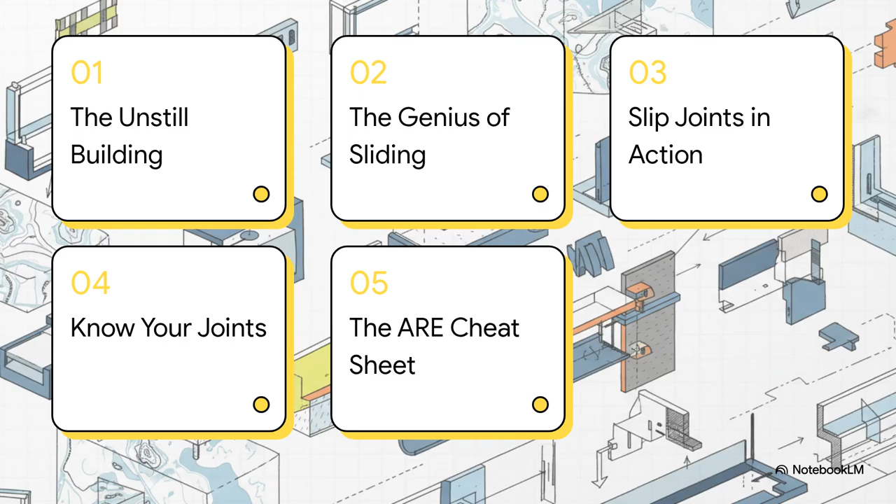So here's our game plan. First, we're going to dig into why buildings are, believe it or not, constantly moving. Then, we'll get into the brilliant solution, the slip joint. After that, we'll break down the exact details you're going to see on exam day, clear up some major confusion between different joints, and then I'll give you the ultimate cheat sheet to lock it all in. Sound good? Let's go. All right, let's kick things off with section 1, the unstill building.

See, before we can really appreciate the solution, we have to understand the problem. And the big secret, the one that causes so many headaches, is that buildings are never, ever standing still. So that begs the question, why do buildings move? I mean, it kind of goes against everything we think about architecture, doesn't it? We build these massive, solid structures that are supposed to be permanent. But the truth is, a building is way more like a living thing. It's constantly shifting and adjusting to everything happening around it.

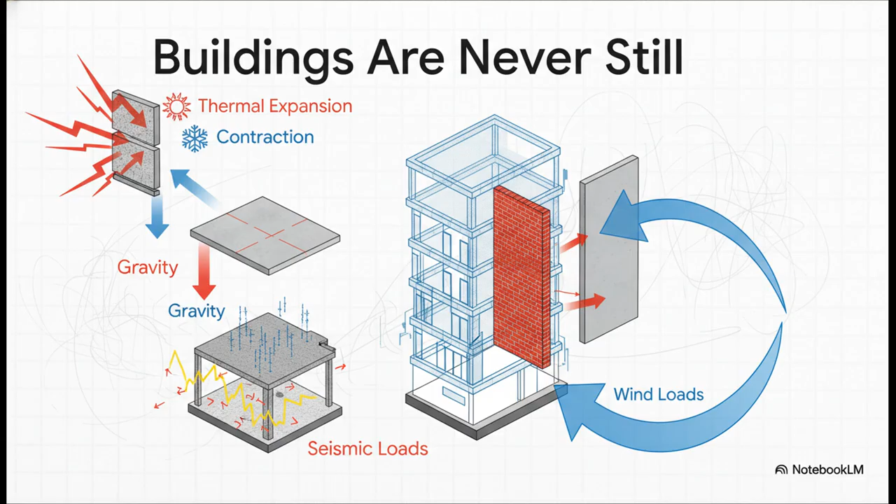I mean, just look at all the forces at play here. You've got the sun beating down, causing materials to literally swell up, and then the cold comes and shrinks them back down. You've got plain old gravity, causing that heavy concrete slab to sag just a little bit over time. That's deflection. And to make it even trickier, different materials move at totally different rates. Oh, and then you throw in wind and earthquakes, and you've basically got a constant battle going on inside the building itself.

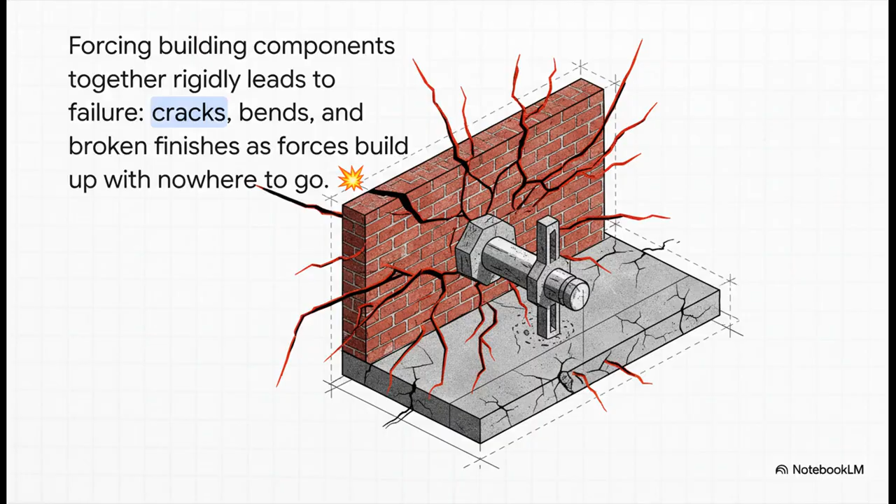So, what happens if we just ignore all this movement? What if we just bolt everything together nice and tight? Well, you get absolute chaos. Those forces have to go somewhere, and they'll escape by creating these awful cracks in your drywall, buckling a perfectly good brick facade, or shattering expensive finishes. This right here is a classic ARE trap. They'll show you a failure like this and ask you to figure out why it happened, and the answer is almost always restricted movement. And that brings us perfectly to our next section, the genius of sliding.

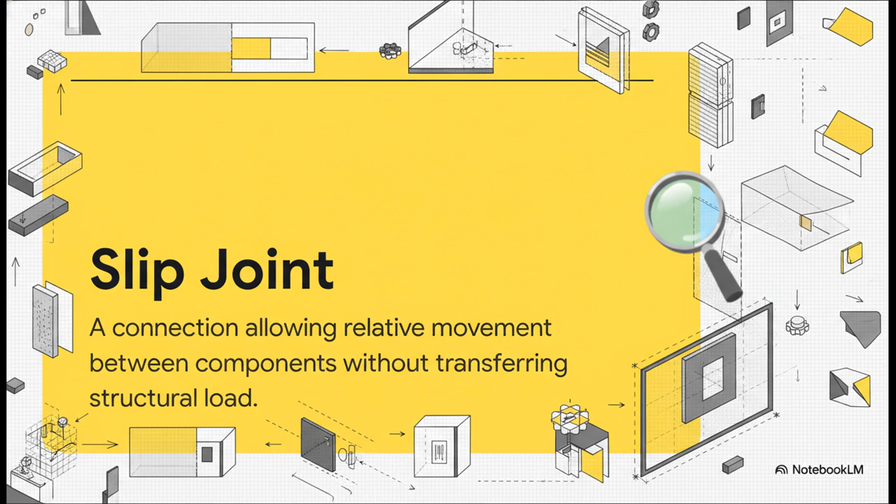What if instead of trying to fight this impossible battle against physics, we could just outsmart it? What if we designed a connection that just lets things move? And that, my friends, brings us to the hero of our story, the slip joint. Now, the official definition is beautifully simple. A slip joint does two things, and only two things. One, it allows two parts of a building to move past each other. And two, it does this without transferring any structural load between them. That's it. That's the whole magic trick.

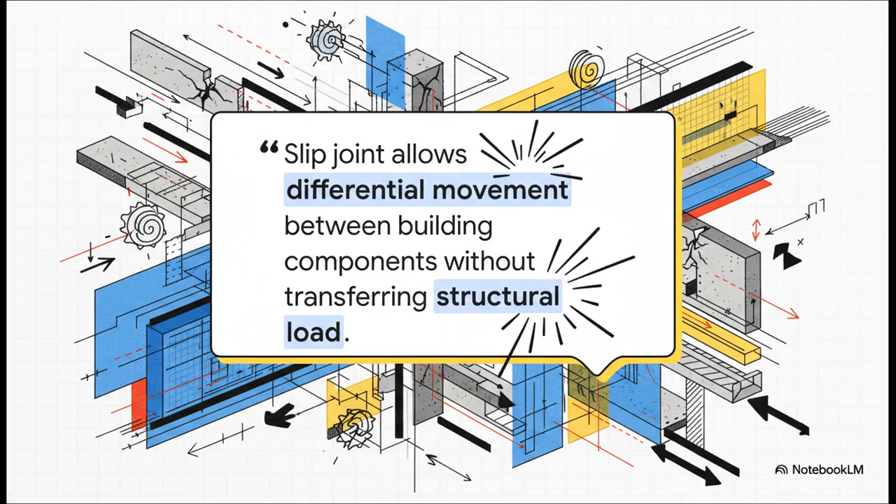Listen, if you memorize one single sentence for your exam, please make it this one. This is the logic that will unlock any question they throw at you about slip joints. It allows differential movement, and it prevents load transfer. Seriously, burn this into your brain. Okay, let's break that down even simpler into what I call the slip joint mantra. Think of this as your quick 3-point checklist for the exam. Does the detail let things move? Check. Does it stop a structural load from going where it shouldn't? Check. Is it dealing with two different things moving in two different ways? Check. If you can answer yes to all three, you are looking at a slip joint.

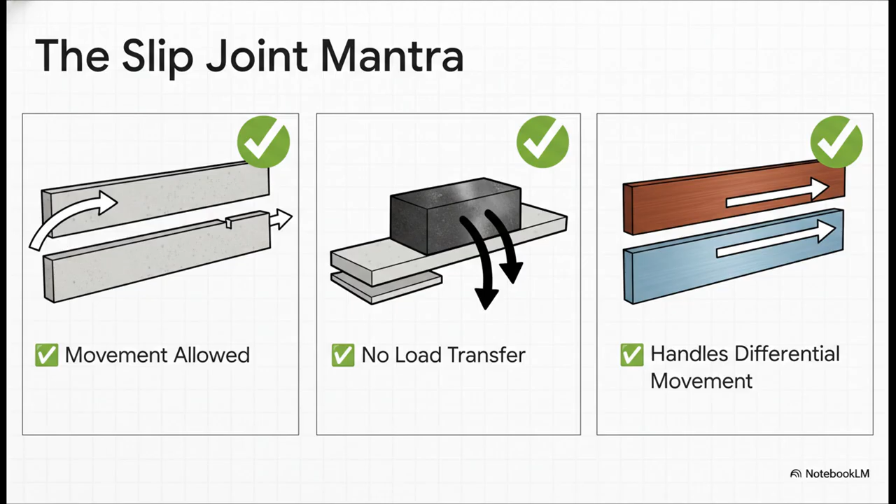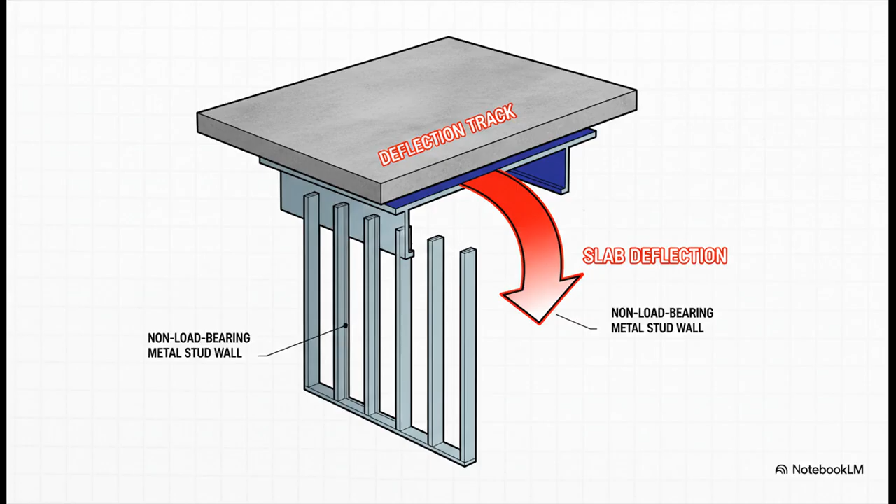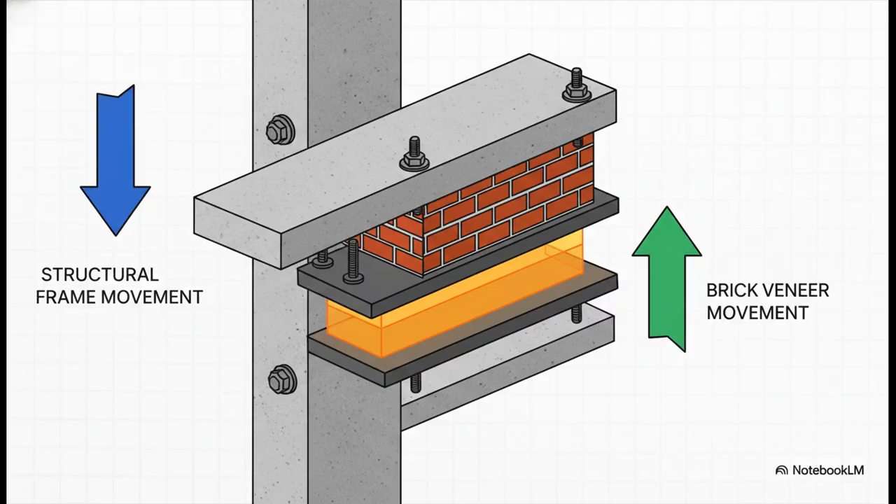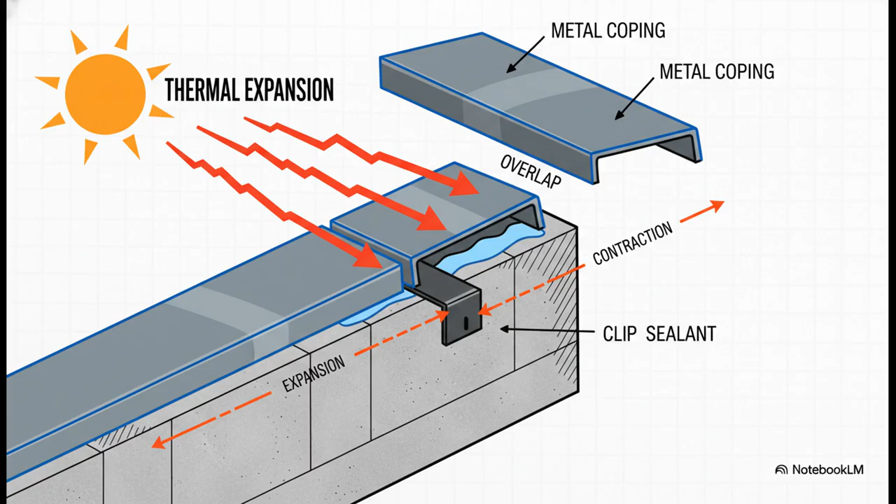And finally, picture a long, dark metal coping on a parapet wall, just baking in the summer sun. That metal wants to get longer, a lot longer. If we tried to make it out of one continuous piece, it would just warp and buckle into a total mess. So instead, we detail it with these simple overlapping slip joints. One piece can slide nice and smoothly over the next as it expands and contracts, all while keeping the rain out. It's such an elegant solution for thermal movement.

Okay, this next part is huge because it's a major point of confusion and a classic exam trap. You have got to know that not all joints are created equal. So let's get this straight right now so you don't lose any easy points on this. All right, focus in on this chart for a second because this is where people really get mixed up.

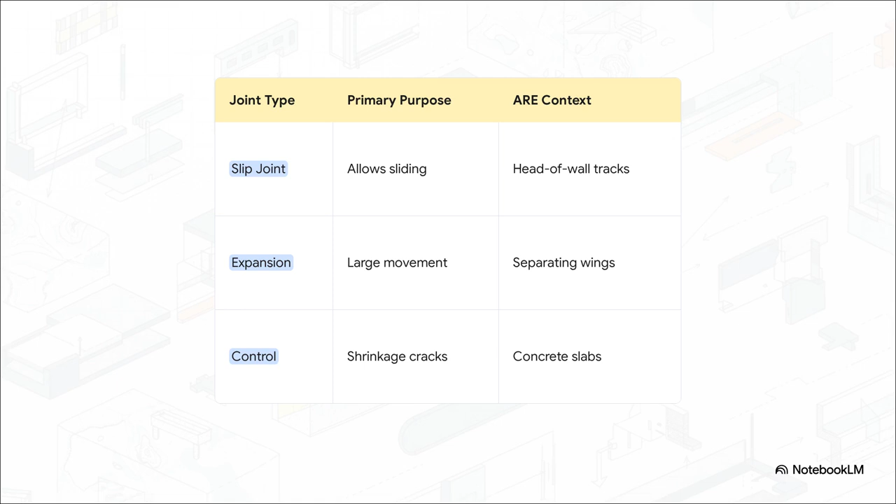A slip joint, like we've been talking about, is for small-scale sliding between two different parts. Now, an expansion joint is for massive movement. We're talking a complete separation between huge parts of a building, like two different wings. And a control joint is something else entirely. It's basically a planned weak line to tell a single material, like a concrete slab, exactly where you want it to crack as it cures. So think about scale: sliding components, separating buildings, or controlling cracks.

And just to show you how this all connects, because for PPD and PDD you have to think about the whole system, that little slip joint has other jobs too. It needs to have a flexible membrane across it to keep the air barrier continuous for energy efficiency. And what if that's a fire-rated wall? Well, the joint itself needs to be stuffed with a special fire-rated system that can still move while stopping a fire from getting through. It's never just one thing in architecture, is it?

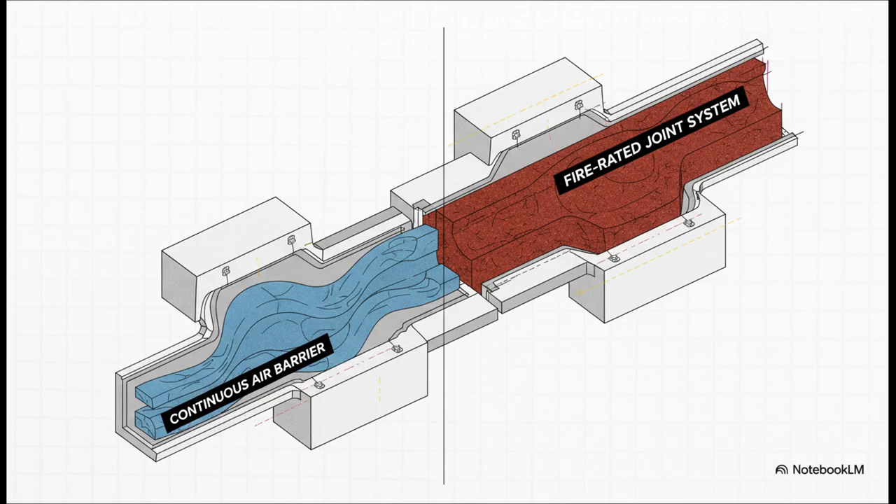Whew, we have covered a ton of ground. So now, for our final section, I have boiled everything we just talked about down to the one single slide you need to screenshot, memorize, and look at right before you walk into that testing center. Here it is. The purpose: allow movement, prevent load transfer. The key locations: tops of partitions, shelf angles, coping.

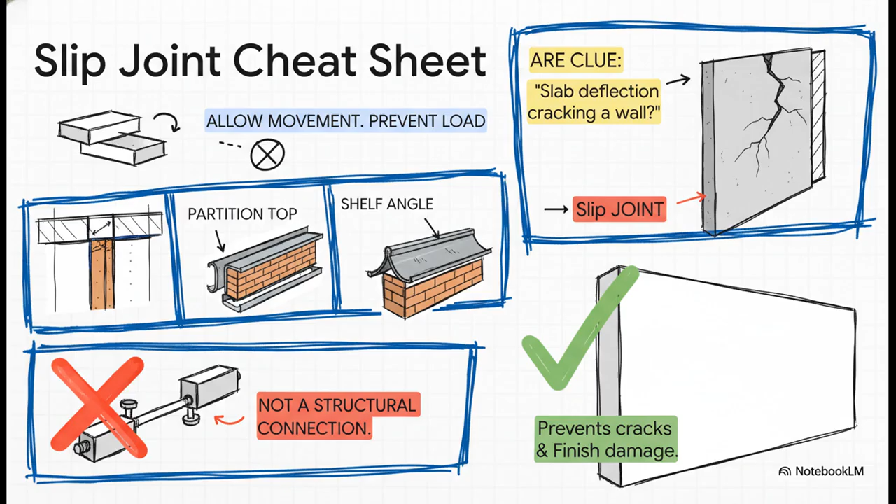If you see an exam question that says anything about a slab deflecting and cracking a wall, your brain should immediately scream, slip joint. And please, remember the traps. It is not a structural connection, and its main job is not waterproofing. Its number one benefit is preventing cracks and damage to finishes. This is it. This is your high-yield summary.

So I'm going to leave you with a little challenge to take with you as you study. From now on, whenever you look at a set of drawings, go on a hunt for the slip joints. And even better, try to find details where one is missing and see if you can predict the exact failure that would happen. That right there, that kind of active thinking is what's going to get you a pass.